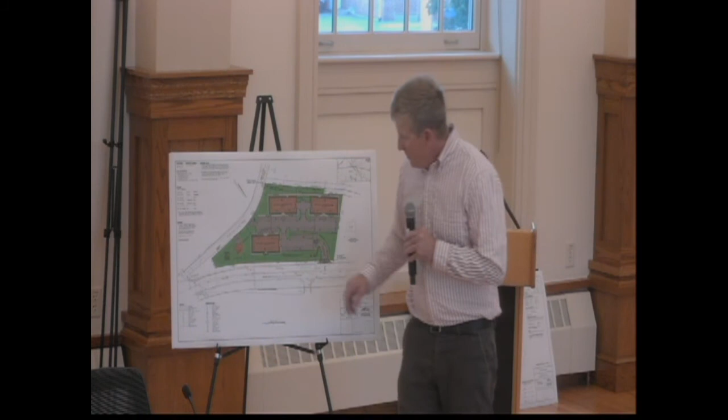The development will have 25 units in each building, with an emergency access point onto Astor Street. These 3 buildings will need to obtain a special permit, which allows that in a commercial district you're allowed to go over the 2.5-story maximum and up to 5 stories. In this case, we'll be at 4.5 stories.

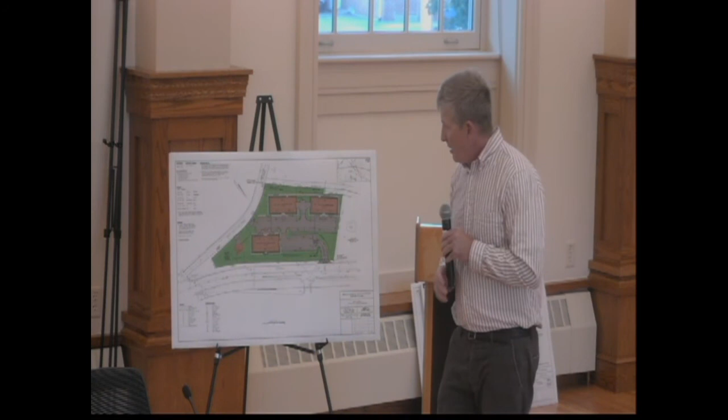This development has also been fully engineered out, and engineered plans were provided to Mass Highway related to the drainage that could affect Main Street, which is under Mass Highway's jurisdiction. Is that it? I bring it to the board. Anything else? That's it? What's up, Mr. Fowler?

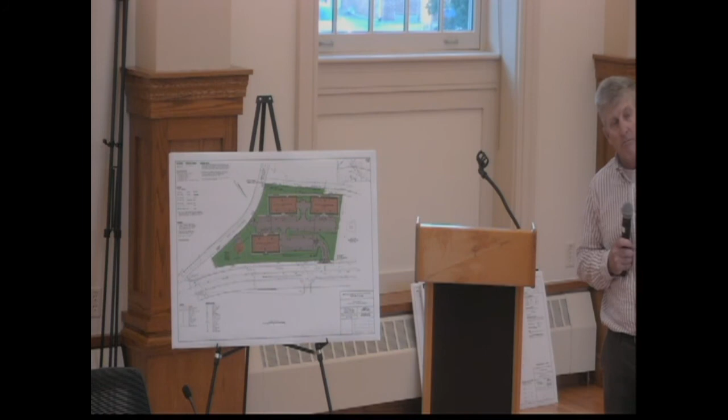Thank you, Mr. Chairman. Your last phrase, talking about Mass Highway, I'd be very interested to see what they say. They have the last word, obviously. But I just don't know how a person turning left there can cross those 2+ lanes to go towards Lowell, with a set of lights at Pike and Astor Street and a set of lights at the shopping center, Walmart Shopping Center. Unless they're timed perfectly, I don't see how someone can move out and not block traffic driving on Route 38.

So, as you can imagine, this project was looked at very closely by Mass Highway, just like any other curb cut under Mass Highway's jurisdiction. I understand that. I think we went through a 6-month review process with Mass Highway, going over each and every one of those issues. Mass Highway ultimately approved this curb cut, having looked at all the issues that would come up related to cars coming and going, with a full traffic report that was submitted. We retained the services of Kim Hazarvartian, a traffic engineer who I'm sure you know. All I can say is that we did receive a street access permit from Mass Highway for the curb cut.

I'd like to say this again, and I'll add one thing.

You never know who you're gonna get to review your next plan at Mass Highway, and I'm not blaming them, because this was approved or looked at by someone a year ago, doesn't mean the same person's gonna look at it and have the same philosophy.

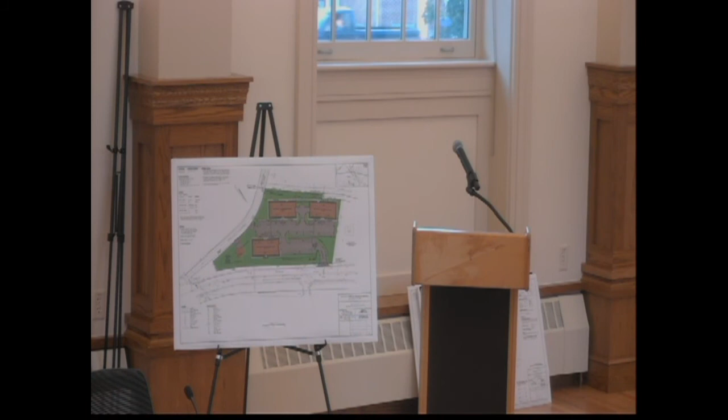I really don't have any place to start. You know, it's a pre-plan, there's a lot of stuff here that's not in it yet, like the snow, how they're gonna get the snow out, and has the fire department actually approved this?

They're coming in and out. Obviously, they don't think buildings burn in the back, so the fire truck has no way to get to the back of the building. In the driveways, when the cars are parked, they're giving you like 25 feet.

But when the cars are parked, they're never right up against the curb. I don't know if there's enough room, even in the parking spaces, for the fire truck to come in. And who's to say which way the fire truck is gonna go in?

Do they just use the emergency access? Is that the way it's gonna be? Or do they use the one that comes off of Route 38 as well? And then how do they make the turn and get to wherever they want to go, if a mistake is made?

That's my concern. I know that the lefts and rights are going to take place with this project, and there's going to be dreadful traffic. That's why Mass Highway originally made it that 3-lane, 4-lane road come down to the lights and so forth. One car coming up that road to take a left stopped traffic all the way back to the town hall. You look at it.

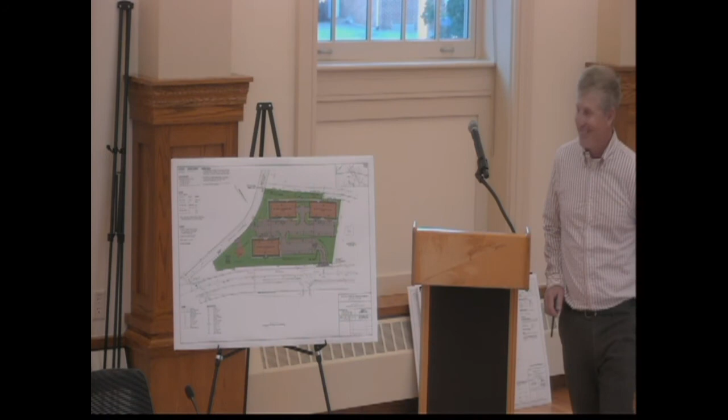What was the unit number on the original project? It was 75, so that number's the same. Yeah, 77. We're calling it 77 because there's this duplex. Oh, the existing? Yeah, okay.

All right, well, I mean, like I said, I've said it before, I'm loath for things not to be able to be developed, but we do have the same problem we had before, which is the current concern's going to be size. And that was the concern originally.

You know, I'm trying to remember exactly the conversation about the mixed one with the commercial. I thought we were more amenable to that because I thought it was better to have it broken up into less housing and a little bit of different things. But I could be wrong. I don't recall, the way you said it at the beginning, that we weren't in favor of that. I don't remember that being the case. I'm sure we had questions, but I don't remember us being negative to it, to the point we were to the original project that was brought in some time ago.

I mean, you've got your curb cut now, obviously, and we've done this with every one of these when we've had them, the amount of aesthetics that's going to be necessary to make sure that these, if they're approved, look like something that we want people to see as they're coming into town. I think it will be substantial, as most of the projects lately have been. So that won't be unique, but obviously these are a good size in a pretty tight space.

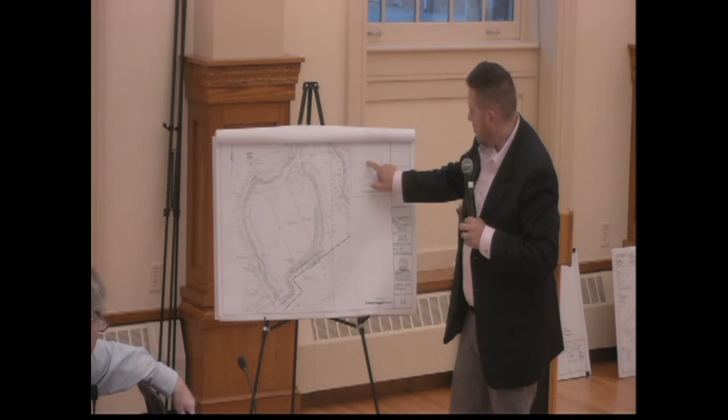Wanted to put this in section just so you can get a sense of it, because obviously we're sensitive to the impact to the abutters. So essentially we have a 25-foot undisturbed buffer, and a 15-foot wide berm where we'll have 12 to 14-foot high evergreen trees planted 15 feet on center.

To try to provide as much of a visual buffer as we can. Continuing along with this, so of the 31 plus or minus acres, we're proposing to disturb approximately half of that, so it's about 14 acres of total area of disturbance.

So really the construction sequencing is: place erosion controls along the perimeter of any of the resource areas. Then we have these diversion swales that are essentially along the perimeter of the earthwork. These diversion swales are proposed to capture flow off of the earthwork and provide a place for sediment to settle before it discharges out to the resource areas.

So we don't have an increase in peak discharges, and what we're trying to do is look at this from an erosion and sediment control perspective.

Obviously, then would be tree cutting and stumping and regrading activities. Essentially everything on this side here, and then on sheet C1, which would be over here, those two areas make up the 14 acres.

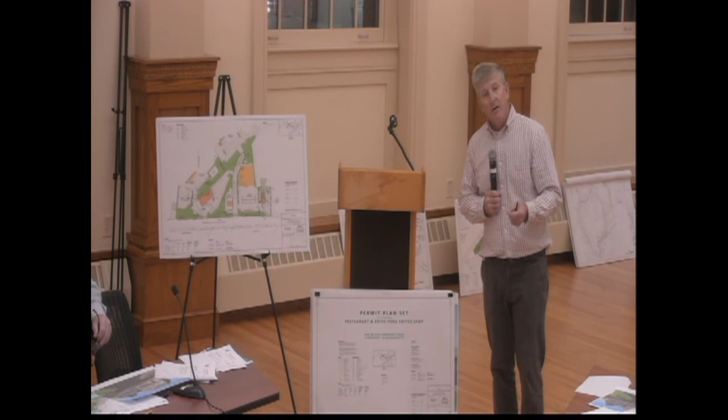So to bring us up to speed as to where we're at, we did come before the board for an informal discussion for this proposed restaurant here and this drive-through coffee shop that's located here. We've gone to an interdepartmental review meeting and received comments from all the various departments. We received all those comments, and then we felt it was necessary to continue, or not open, the first meeting that we had, which was the last meeting. And then I believe there was a quorum issue, if I'm not mistaken, and now we're here for our first meeting.

So what we have here is a proposed restaurant here. It's going to be a one-story restaurant. I'll put up the rendering in a minute. There's going to be a main access drive off of Andover Street. The access drive will bring you in front of the restaurant with parking in front with handicap spaces, parking directly across, some additional spaces over in this area, in a parking lot up here, with a loading area next to the building.

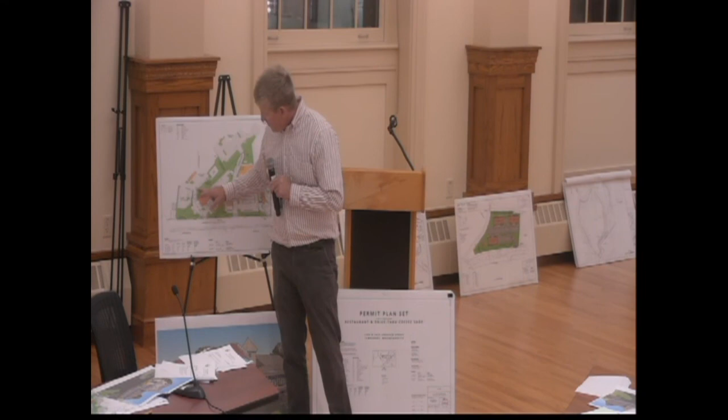We're also going to provide a connection here to the main access drive that was previously servicing the ATM drive-through here, and there's an existing daycare facility located here. This access drive also provides access to the newly occupied building in the rear, which is currently occupied by Lowell 5, I think, as everybody is aware. There was also a proposal to provide an access drive to the hotel, which is located here, and that's shown here.

Additionally, as part of this project is a coffee shop here with a drive-through. You're going to notice I have a new handout, and I think there was a little bit of confusion related to the drive-through before, because our original proposed queuing, showing the maximum amount of cars that could be queued within this area, had all the vehicles in the middle of the lane. And I realized that even though this area is only 14 feet wide, it actually has enough room, if the vehicles are next to the window area - which most of these vehicles would be, trying to get as close to the window as they can - that you can actually get by.

So if somebody wanted to exit out, they could actually get by here. And this also shows that we think the realistic queuing for this drive-through is only going to be this amount of vehicles here, not necessarily coming all the way out to Andover Street. So we're going to have that discussion a little bit later. This plan is different from what was originally submitted. I realized I wanted to show you folks this today, and we just redid this rendering, which shows an additional change here.

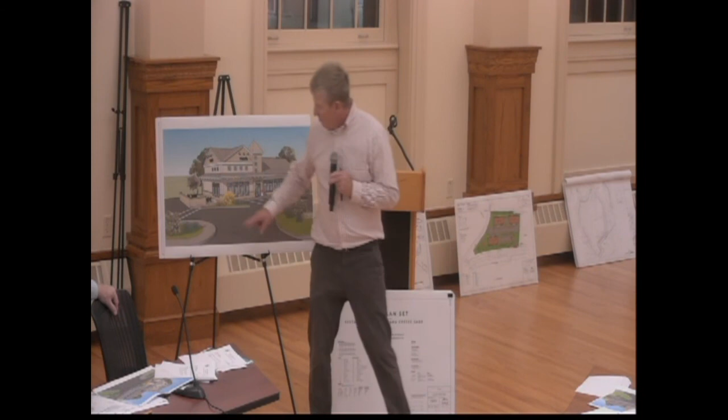The rendering has also changed, and I wish Mr. Fowler was here, because I believe he had the comment related to the protection of the patrons utilizing the outside patio area. What we've done is there's going to be bollard protection inside of this veneered brick stone facade that'll meet the requirements to protect those patrons in case there is some sort of accident in the access drive area, which you commonly see in front of pharmacies and whatnot.

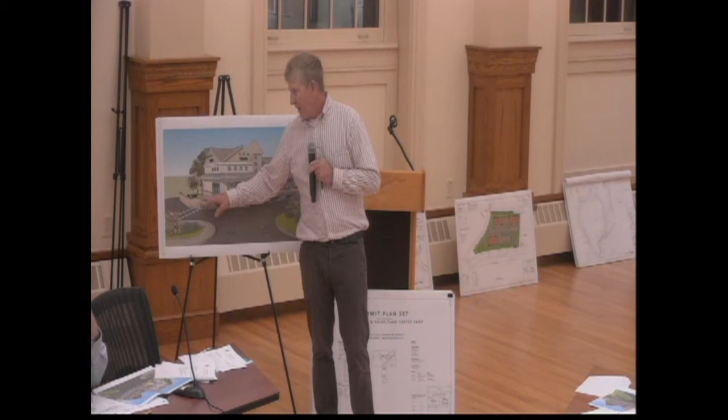You're seeing bollards in front of all the buildings now. I believe that's being generated by the insurance companies that are trying to provide protection of the people within the facility itself and have some extra protection. So this will have interior steel bollards within the wall itself. This is a change from the original rendering that was submitted with the project, with the addition of this wall.

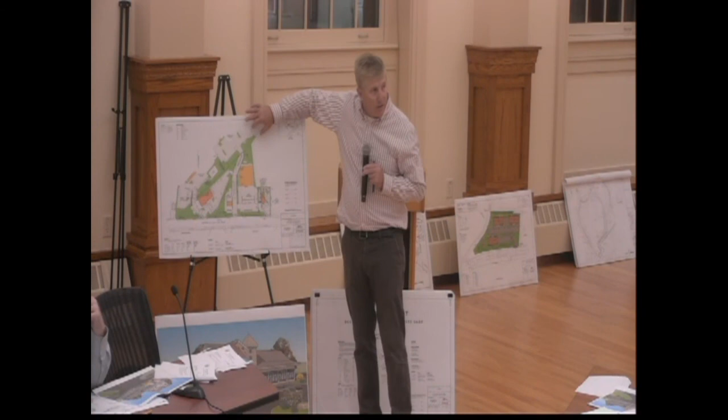The parking for this facility, the parking for the restaurant right now, is 45 spaces within this area here. And then there's going to be 25 shared spaces up in this area for all the employees of the restaurant itself. There's a connection from this area with a sidewalk system that'll bring you into the site.

This is very important because the amount of seats in the restaurant is driven by the amount of parking spaces that you have available. So our 45 spaces will allow us 2.5 seats for each parking space. That's really important that we actually have this additional space for the employees, to get our number of seats up as high as we can based on that parking.

We have comments from the engineering department and the DPW related to the site here. We've retained Kim Hazarvartian, who's the traffic engineer that was the original traffic engineer for this development. He's going to be providing an updated memorandum that's going to show that this development is not going to impact the previously approved traffic memorandum. Because if you recall, this was a Honey Dew and a Subway.

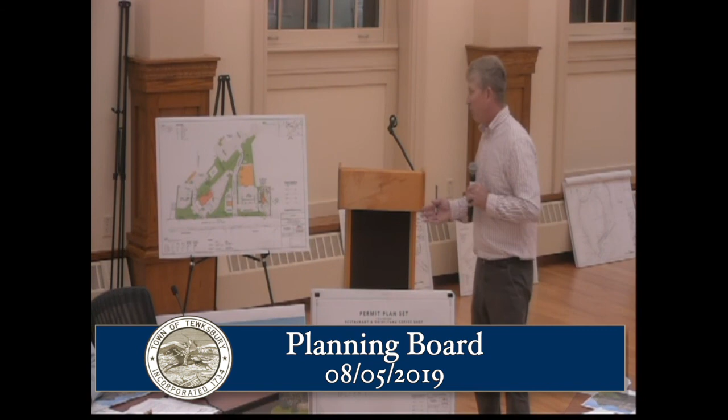The coffee shop. We changed this plan because we did realize that essentially we feel as though, even though I showed a queuing line that came all the way up here that could handle 12 or 13 vehicles, we don't feel as though we're ever going to have any more than the vehicles I'm showing here, maybe one or two occasionally, but it's for a very short period of time.

One of the comments is to provide a bypass lane for the coffee shop. Where it would be nice to have, we just don't have a lot of room to afford to do that. And I think the main purpose is if somebody has an emergency and they want to get out of the queue. Well, I realize that if somebody does have an emergency, they can get by.

And we can also incorporate sloped granite curbing on the side so that if somebody wants to ride up on the edge, if it's really an emergency, they can do that. Or this is such a small queuing line that if somebody has an emergency and they're honking the horn, God forbid it ever happens, I'm sure it's going to happen rarely. I've never myself seen it happen, but I can't say that it won't.

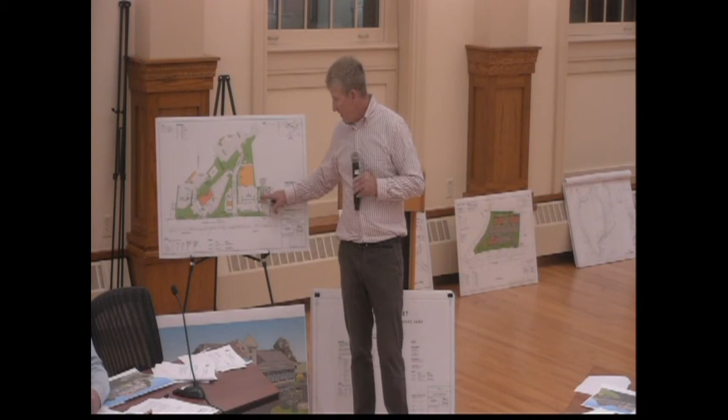People will just get themselves out of the way if there's a real emergency here. And I think that should be good enough in order for folks to get out here instead of trying to take up what we really need, which is snow storage in order to make this project work.

And another comment that came up that I honestly didn't realize was an issue, but why can't we have snow storage on a landscaped area? As far as I know, that landscaped area is already going to have snow on it. And why shouldn't we be able to plow the snow and utilize those landscaped areas for snow storage when we've always been doing that in the past in our designs?

It's the first time I've ever heard that comment be an issue, that we're going to just have a snow storage area with no landscape in it. Yes, landscaping can get damaged with snow, but in my mind, when we get a foot of snow, that landscape's already got snow on it, and we're just putting more snow on top of it.

So I'm sure the board knows more about that comment. I hadn't seen that comment before, but I thought that that was a comment that could really affect the design of everything, because everywhere I go around, all the landscaped areas are utilized for snow storage.

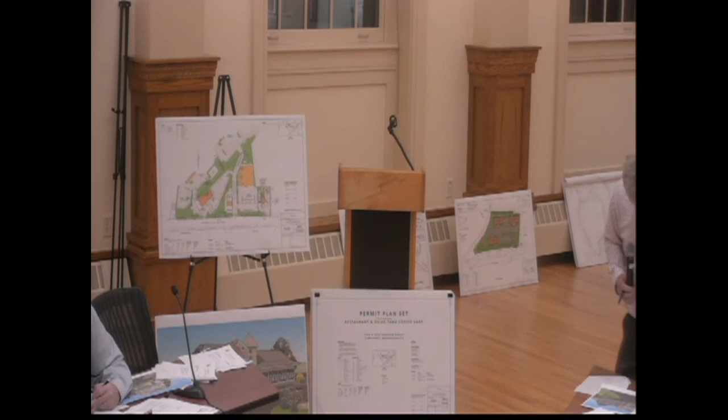And I think I can put it to the board for questions. All right, start with Mr. Fattalia. Thank you, Mr. Chairman.

I like the concepts on both buildings, but I know firsthand that you are going to need 2 lanes of traffic in and out of the coffee shop. I see it so many times at Dunkin' Donuts when I'm there, that people don't want to wait. They're so impatient, and regardless of whether it's an emergency or not, they need an avenue to get out. So you need 2 lanes going in and coming out. In the event somebody does not want to wait for their coffee and has to leave, they shouldn't have to beep their horn, they should be able to get in and get out from that location. So whatever you have to do, whether shrinking the building down a little bit or adding some space somewhere, there has to be 2 lanes, in my opinion, going in and out for patrons.

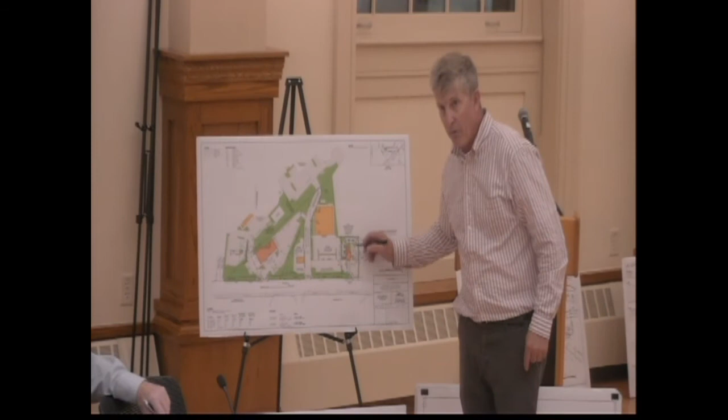So would you say going in and out? I was talking about 2 lanes. Going around here, I mean, we have an in and out here. Yeah, I'm talking about going around. Going around, so it's just going in and then coming out, you mean? Yeah, if somebody's in line, queuing in line, and is not willing to wait for their coffee or for whatever reason has to exit, there needs to be 2 lanes to turn out and get out, somehow, some way in that process.

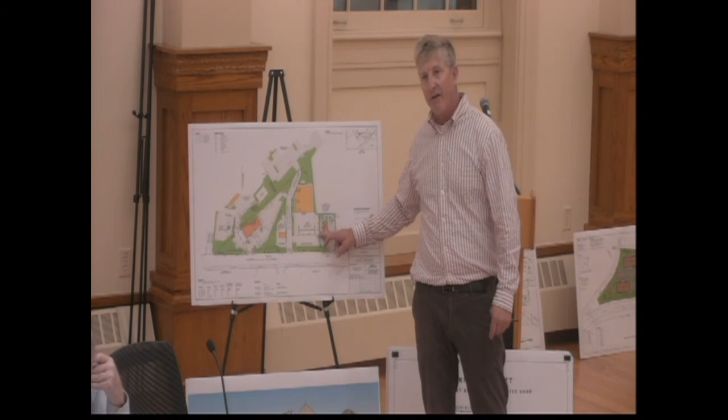Or it's not going to work. You mean you say beeping the horn, people are going to move. They're not going to move. You need access in the queuing lane for someone to exit out of the lane and go around. I know what you said, it's tight, it's very tight on the bottom. You said 7 feet, there's 14 feet there? Yeah, so we have 14 feet. Well, the whole lane is 14 feet. Right, so 7 and 7? So this whole thing is 14 feet. It wouldn't be meant for 2 lanes of cars to be traveling around this drive, like a typical drive would be, that would be more like 20 or 22 feet.

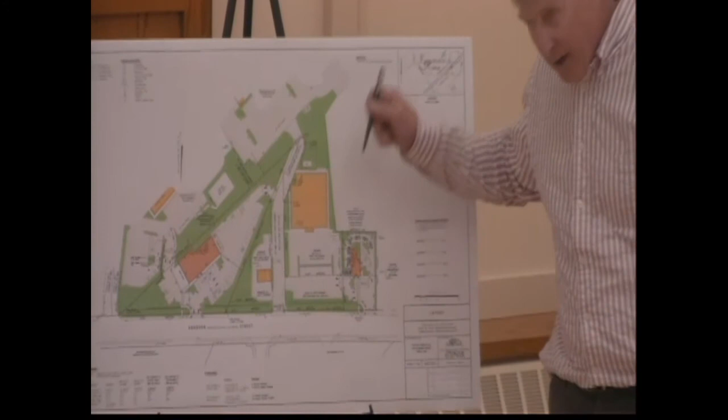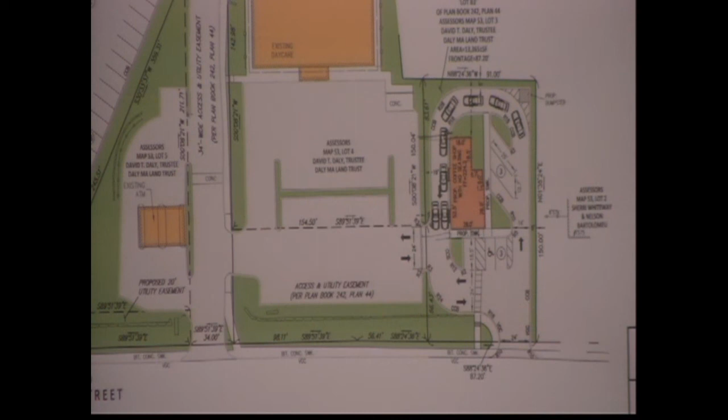To have safe 2 lanes of vehicles navigating themselves around a corner. And you don't have that capacity here to do that? No, it gets too tight in the rear. But I'm not gonna sit here and say that this would be enough for that to occur. When you're coming straight out here and you're in here and you're straightened out, now you can sneak by, okay? Yes, maybe we can make this another foot wider, maybe 2 feet wider to help with that in here. But to make this fully 2 around here is just really gonna, I just don't see it working if you can't do that myself. But I think you need access for the public to get in and get out if they don't want to wait and queue in line while they're queued in line for whatever reason. So that's my opinion.

So I know you have a number of issues outstanding with Mr. Hardeman, so hopefully you'll have them resolved at our next meeting going forward. But how far is it from the back parking lot to the restaurant for employees having to walk? Any idea? Looks pretty substantial. Substantial? It's under a mile. Good, it's 400 feet, which really isn't that far to walk.

Yeah? Work off a slice of pizza. I mean, it's probably 100 feet to the parking lot over here. So 400 feet. A lot of these folks will be coming at 10:30 in the morning, there's not much going on around here, and they're gonna walk over to that restaurant, and it's 400 feet. That's gonna be one of the problems, I guess, if you work at the restaurant, you're not gonna be able to pull right up. And when you leave at night at 1 o'clock, it's gonna be the same process, right, in a lighted area? Yeah. Okay, all right. And we know that there's a lot of security around here for the daycare and the bank.

So just one more question, and I'll let it go for now. The Aroma Joe's design, is that typical of the chain, the design of the blue and offset colors, you know? Yes, it is, it is typical. We have softened that blue color. We've been working with Aroma Joe's on that. There is flexibility to revise those colors if necessary.

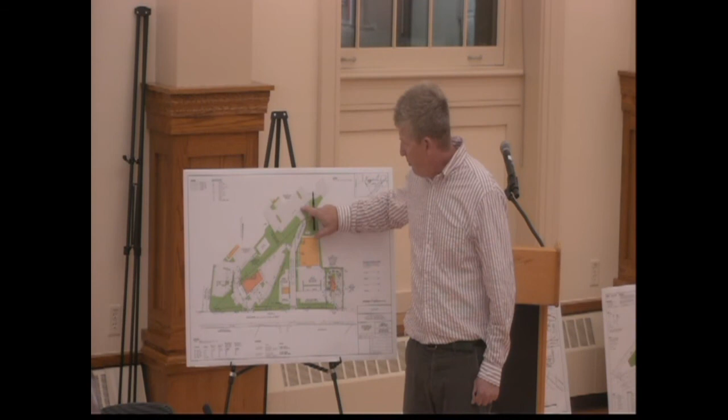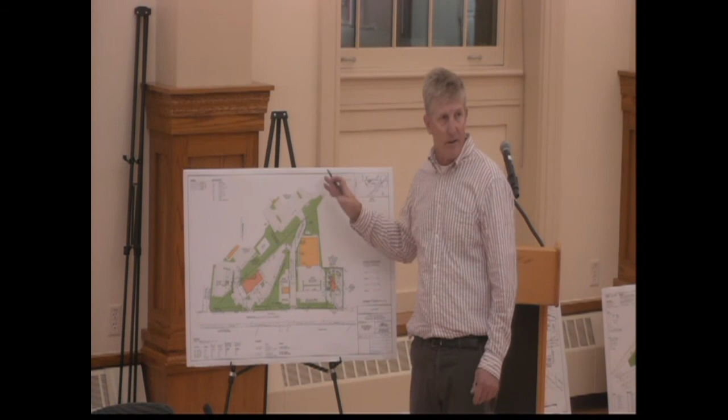I can't say that nobody uses this area right now. It's not actively used, there's no curb cut to North Road off of this. So maybe we could just incorporate some striping, just something that delineates that walkway for future, and then obviously making sure that the lighting is safe going back there, Phil. You're walking, as Mr. Fratelli said, at night, you're given the excess parking.

Other than that, I like the design. I will say, I was just up in Maine the last 2 weekends ago, and the Aroma Joe's are everywhere up there, and they are blue. So if you can tone the blue down a little bit, they do stand out, I will say that, so just to fit in that area.

We were... I'm not sure if you're familiar with the Adams Terrace in Lowell. The first house on the left, it's Arctic blue. That's the color that we're looking to go with. Good, that's all I have, thank you. Okay, all right.

So let me start with the coffee side. Am I incorrect, but I thought the last time we talked about this, that arrow that shows people going left in the front isn't supposed to be there, right? Yeah, we're gonna modify this. You did mention that. Okay, so that one's not - it's not to come in and go left. That's correct, okay, sorry about that.

I should have updated. So just because I think that traffic turn would be a nightmare if people are actually doing that. I mean, I'm fine if you can figure out how to fit in the drop-down lane to get people out, that's fine.

I know if I go to Burger King, I'm committed. I get in line, I gotta go through the line, there's no way out of there. Not every drive-through has two-lane escape hatches if you decide you've changed your mind when you arrive and no longer want to be there, but if you can fit it, that's fine. I'm not as concerned about it, because I've committed to enough drive-through lanes that I've made my decision.

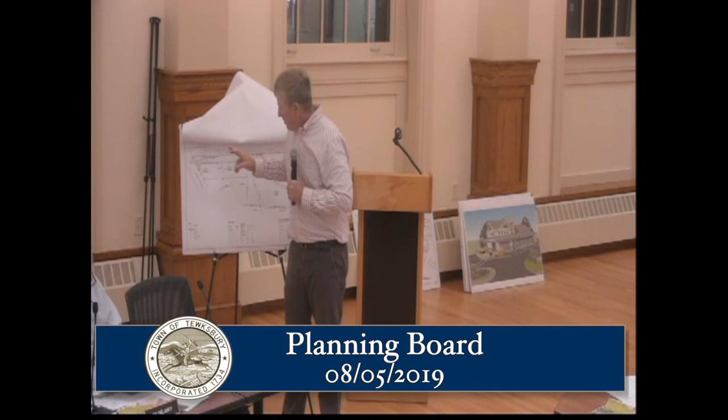We got the comments on Friday. Apparently I was supposed to show the center line of the right-of-way where it now bends, because the curb return has the right-of-way center line bending. I didn't correctly show how that comes into Andover Street. We can most clearly make the change, but I just wanted to let you know that I left the meeting thinking that we were all set, because we got rid of the need for a waiver, technically from the DPW regulations related to that pavement being in front of the frontage, and now that comment is gone.

But what also happened, unfortunately, is the town engineer went out and stood at where the entrance is to the roadway. And we now have a comment that says I observed the sight lines from the existing driveway at Andover Street. The sight line looking west was obstructed due to a parked vehicle.